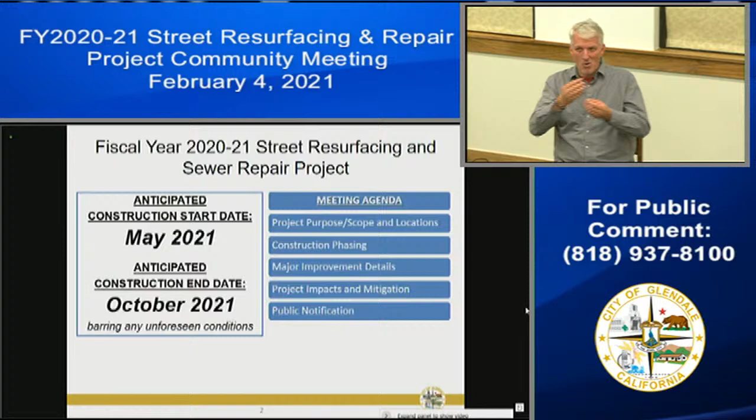Next, I'll touch a little bit upon the meeting agenda for today. First, we'll go over the project purpose, the scope of work, and locations. Then we'll cover construction phasing. Next, we'll cover major improvement details as it relates to the project, project impacts and mitigations. Then we'll cover public notifications, and lastly, we'll take questions and comments from you.

The project purpose is pretty straightforward for a typical public works project, and it involves the selective removal and reconstruction of deteriorated pavement. It also involves surface grinding and placement of ARHM, which is asphalt rubber hot mix pavement, over an asphalt concrete leveling course, application of crack sealing material, and emulsion aggregate slurry, also known as Slurry Seal.

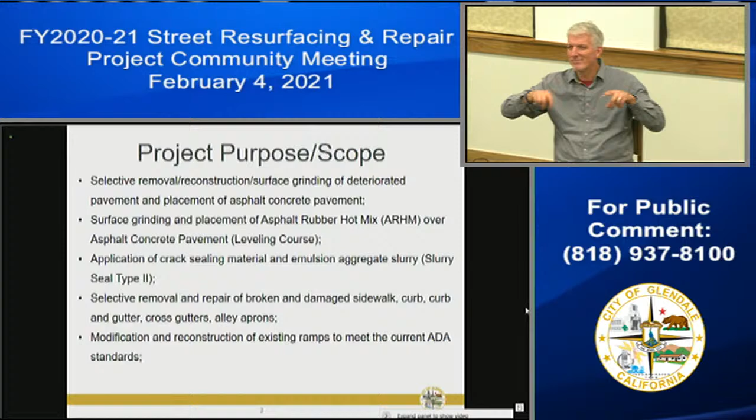Selective removal and repair of broken and damaged sidewalks, curbs, curb and gutters, cross gutters, alley aprons, and driveways; modification and reconstruction of existing ramps to meet current ADA standards; removal and planting of new trees and pruning of tree roots per professional arborist recommendations; adjustment of existing manholes, water meters, and other utilities to finished grade; removal and replacement of existing traffic striping and installation of new striping; and sanitary sewer point repairs and lining at various locations throughout the city.

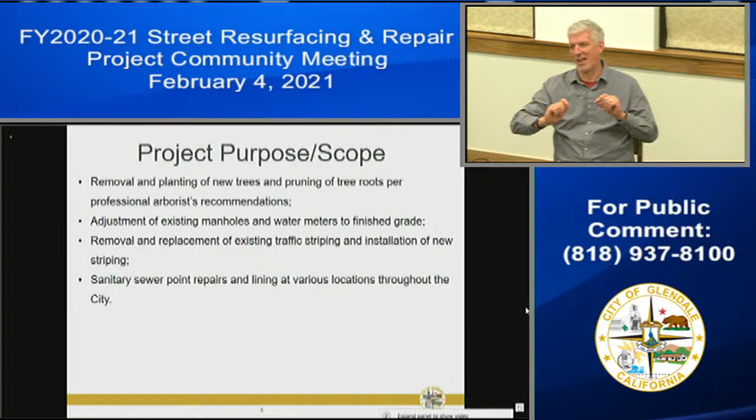We'll go over in more detail in the next several slides what each of these improvements entail. So the project location, I'm pretty certain you can see the project location map.

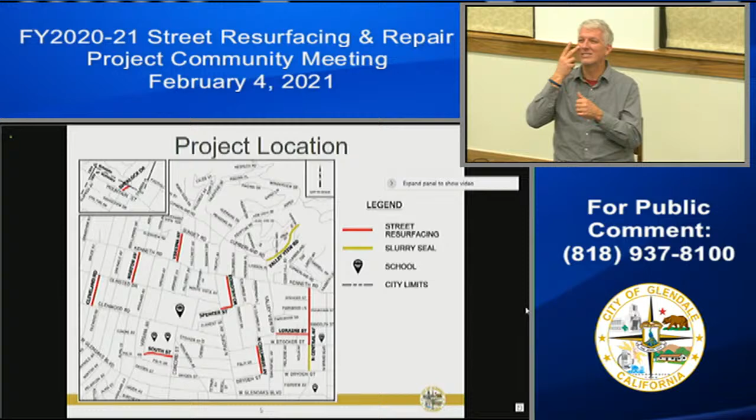As you can see, there are two types of street improvements as part of this project. The first, depicted in red, is street resurfacing, and the second, depicted in yellow, is Slurry Seal. I'll go over in more detail as to what those mean.

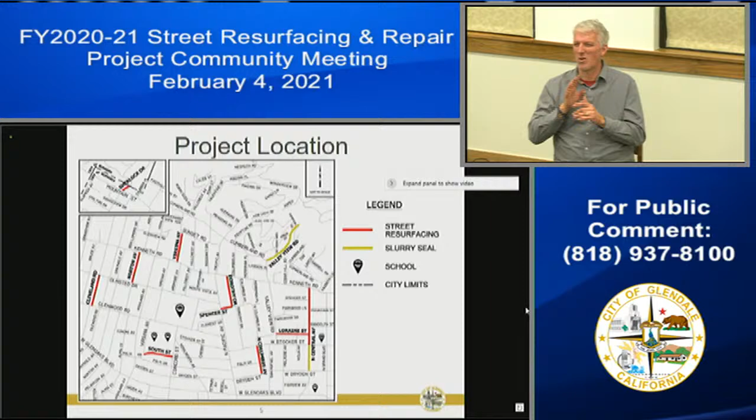I'll go over the names of the streets in case the map isn't legible for everyone. The resurfacing streets will be Cleveland Road between Glenwood Road and Olmsted Drive, Norton Avenue between Olmsted Drive and Kenneth Road, Virginia Avenue between Kenneth Road and Sunset Road, South Street between Virginia Avenue and Concord Street, Spencer Street between Pacific Avenue and Dorothy Drive, Columbus Avenue between Dryden Street and Stocker Street, Loraine Street between Valley View Road and Central Avenue, Central Avenue between Stocker Street and Kenneth Road, and Sherlock Drive between Mountain Street and city limits.

As for Slurry Seal, those streets will be Valley View Road between Cumberland Road and the northerly end of Valley View Road, and Central Avenue between Dryden Street and Stocker Street.

All right, some facts or acronyms to keep in mind. R&R stands for remove and reconstruct. AC stands for asphalt concrete. PCC stands for Portland cement concrete. ARHM, as I mentioned, stands for asphalt rubber hot mix. ADA stands for Americans with Disabilities Act. And GWP stands for Glendale Water and Power. I'll be using some of this terminology in the next several slides.

So construction phasing. This covers how the project will proceed. Once construction begins, the first improvements will be the concrete works. The second phase involves asphalt concrete removal and replacement. Phase 3 is street resurfacing as a whole. Phase 4 is utility adjustments to the new finished grade. Phase 5 is installation of traffic striping, signing, and pavement markings. Phase 6 will be planting of new trees. We'll cover each of these improvements in more detail in the next slides.

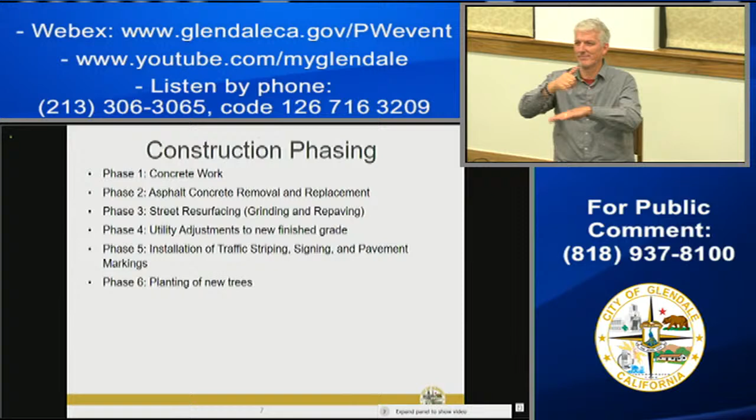So what is concrete work? Concrete work, as the name suggests, involves everything that is made of concrete. This means sidewalks that have been uplifted or are cracked or damaged, curb ramps that are not ADA compliant which we bring to ADA standards, and driveway aprons.

It's a twofold improvement. If the driveway is in good condition but does not meet ADA requirements, which is to provide a path of travel behind the driveway for people with disabilities, we remove those driveways and replace them, providing a path in the back. If the driveway does meet ADA standards but is badly damaged or poses tripping hazards, those driveways will also be removed and replaced.

Actually, there's a third category. The standard in the city of Glendale for the width of driveways is 10 feet. So any driveway that doesn't meet the width requirements of the city of Glendale will also be removed and replaced.

Alley aprons, similar to driveways, those that do not meet ADA requirements will be removed or replaced. Curb and gutters, it is a city standard for roadways to have gutters by the edges of the roadway, by the curbs. So if your street doesn't currently have gutters, as part of this project new gutters will be installed, and gutters that are broken or damaged will also be replaced.

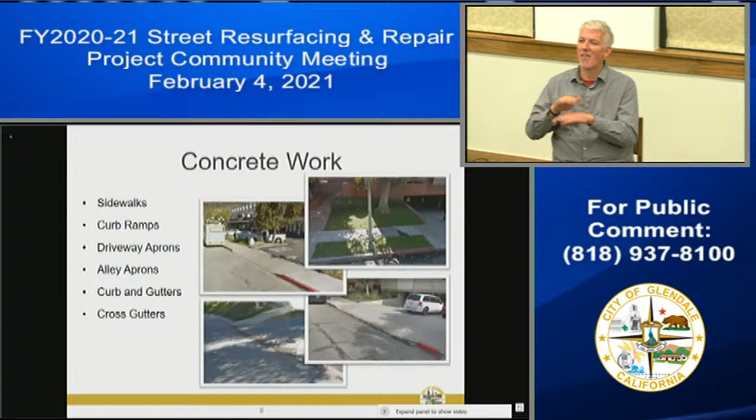Phase 2 of the project involves AC R&R, asphalt removal and replacement. What is asphalt removal and replacement? Basically, it covers 4 categories: base failure, erosion, potholes, and tree roots.

Base failure is when the asphalt has failed all the way to the base. These sections in bad condition will be saw cut, the entirety of the pavement removed, and new asphalt placed. Erosion is a surface failure of the asphalt, and again those locations will be saw cut, removed, and replaced.

Potholes are very localized, and removal and replacement of the asphalt will take place. Finally, tree roots have damaged this pavement, and at those locations, the pavement will be removed, the tree roots pruned, and the asphalt placed back.

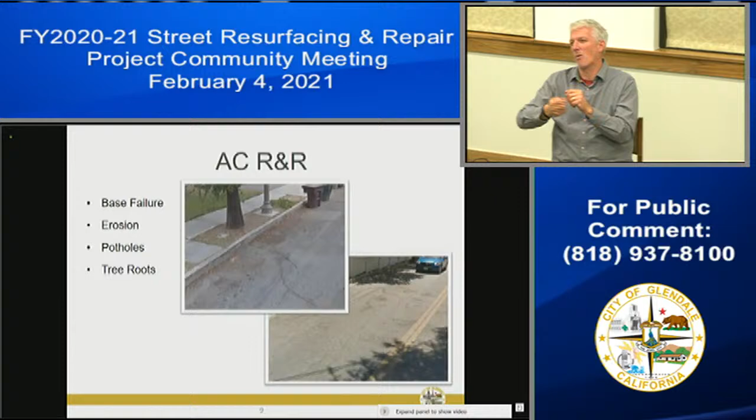The next phase will be resurfacing, a method used to improve the ride quality of the street and the structural integrity of the pavement. This involves grinding the top 2 inches of the existing AC pavement and placing 2 inches of ARHM, asphalt rubberized hot mix pavement.

Sometimes streets require adjustment to the structure of the pavement, so we use an interlayer before placing the ARHM. We place a leveling course, a thin layer of fine asphalt, before capping it with ARHM.

This process is approximately a one-week process, barring any unforeseen circumstances, and it begins a new service life for the pavement. It also prevents excessive AC pavement removal and replacement, so with this option we don't have to remove and replace a lot of asphalt.

On the week that the AC pavement is to be resurfaced, irrigation should be turned off, and parking and access to the street will be temporarily restricted during applications.

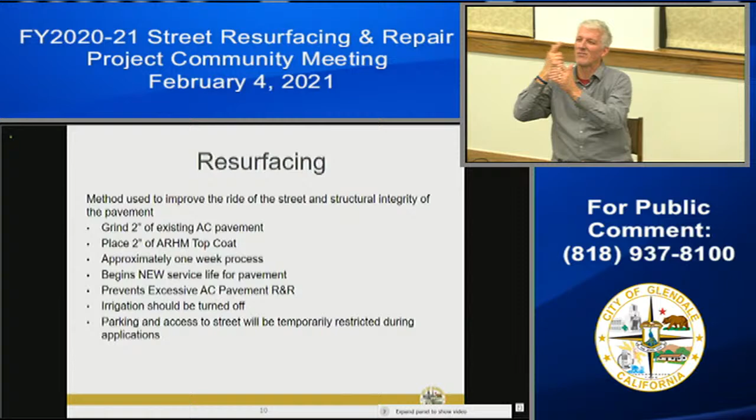Here are some visual representations of resurfacing. The first picture shows surface planing, which is grinding the top 2 inches of the asphalt. The second picture shows application of the ARHM. The third shows compaction, and the fourth shows the striping that takes place after the AC is placed.

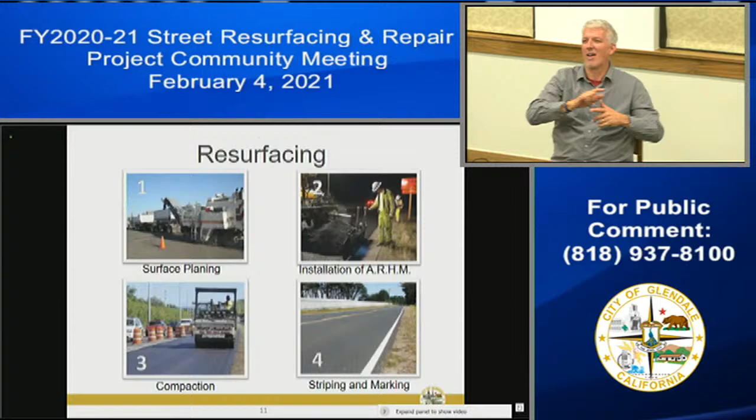The other street improvement type is Slurry Seal, a method to preserve, protect, and extend the life of the pavement. Before we apply the Slurry Seal, cracks on the existing road are sealed.

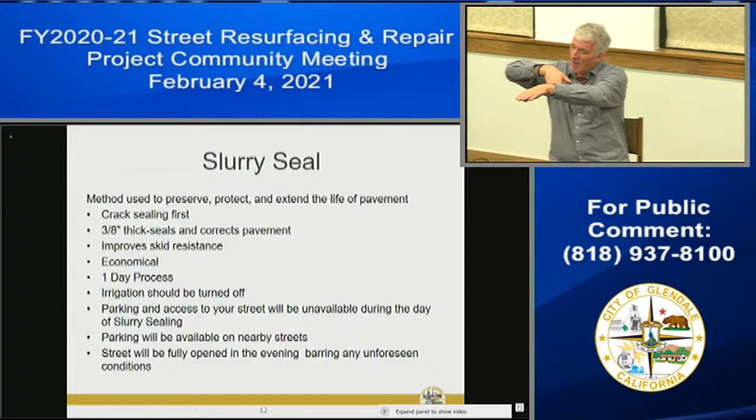Then a 3/8 inch thick seal is applied, which corrects the pavement and improves its skid resistance. It's an economical process and a quick process. I'll cover the timing later in the slide.

As before, irrigation should be turned off during the day of the Slurry Seal. Parking and access to your street will be unavailable during the day of the slurry sealing, but parking will be available on nearby streets. Streets will be fully reopened in the evening after the slurry seal is applied.

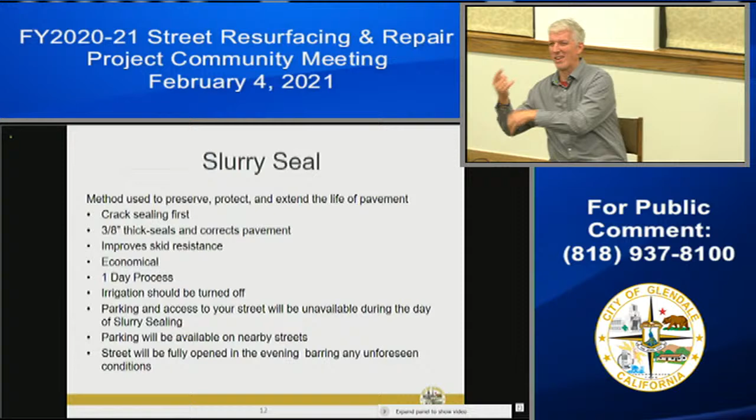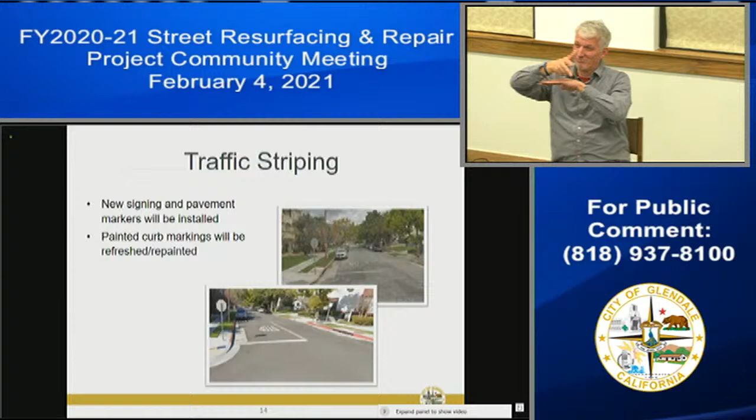Traffic striping will be the next phase of the project, involving new signing and pavement markers, and the red curbs in the project area will be repainted. When we grind the street, the striping comes out as well, so once the new pavement is placed, the contractor will paint the street with fresh striping.

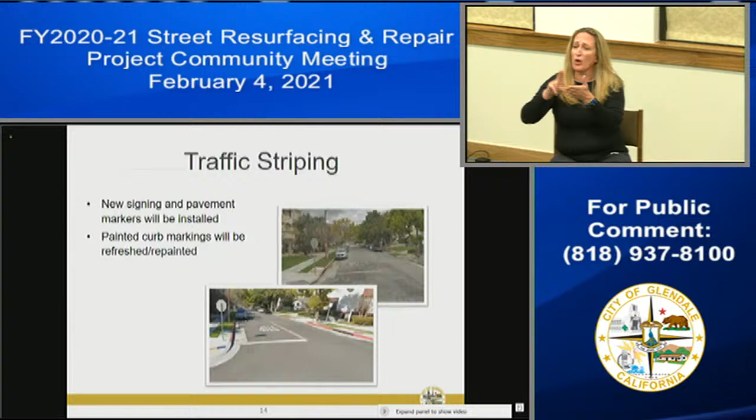Street tree improvements: the City of Glendale has a forestry department, and we work closely with them and our arborists regarding street trees within the project limits. We remove and replace trees, as well as plant new ones, only per professional arborist recommendation. The arborist usually recommends tree removal when a tree is dead, dying, or poses a hazard.

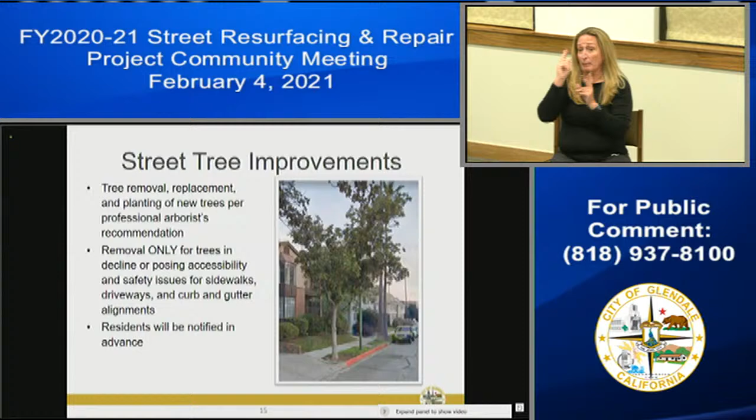Tree removal only occurs in cases of declining or dying trees, but residents will be notified in advance of any tree removals as well as plantings.

Project impacts: resurfaced streets may be temporarily closed during construction. The contractor will notify residents and businesses in advance of street closures. Street parking will be restricted in work areas, construction may be allowed on Saturdays if necessary, and construction equipment and materials may be stored on the street. We'll discuss resident notification in later slides.

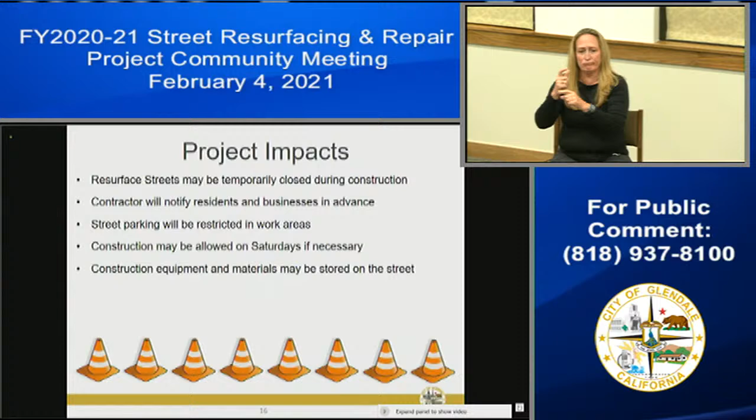Project mitigations: roads will be open and parking available during non-working hours. We will provide alternate traffic routes and maintain driveway access as much as possible. Street closures will be limited to the immediate work zone, and curbs, gutters, sidewalks, and driveway aprons will be constructed one side of the street at a time, with flaggers provided where required.

Public notification. We try our best to communicate to the public our plans and construction progress. The first step of that communication is today's virtual community meeting. This is the first phase, so to say, of the public notification.

Next, we have the city website and bid advertisement. This project will be advertised on Tuesday, February 16th, and you'll find that information on our city website. About a month or two before the actual start of construction, you'll receive a director's letter in the mail notifying you that construction will begin in about a month or two.

In the next phase, about a week or two in advance of construction, you'll receive the contractor's notification letter. This is a letter where the contractor introduces themselves to the public and residents and notifies them that construction will begin in about a week or two.